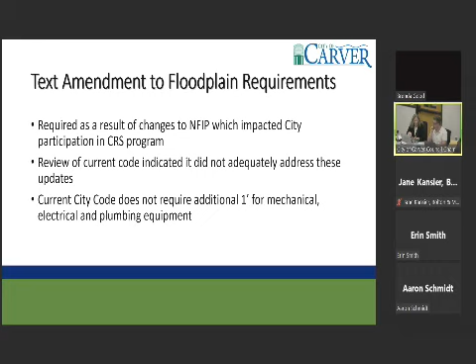The current city code does require a foot of freeboard, or a foot above the flood protection elevation, in order to meet that requirement. But the city code does not currently require that foot of freeboard be applied to things like HVAC, mechanical, electrical, and plumbing systems. So that, in fact, is what the proposed amendment is about.

It's a pretty simple amendment. On the screen you can see the changes. We've basically adjusted the language to note that any mechanical, electrical, plumbing, ductwork, air conditioning, and so forth has to be elevated at least above that regulatory flood protection elevation. Anything below that elevation has to be constructed so as to prevent water from accumulating.

This amendment does comply with FEMA requirements. City staff worked with the DNR and the CRS reviewers to make sure the language was appropriate. The amendment has also been reviewed by the city attorney. Tonight's recommendation is that the Planning Commission recommend approval of this amendment to the City Council. And with that, I'll try to answer any questions.

What if I open the public hearing, now that we've had the presentation? So we will now open the public hearing. Those wishing to address the Planning Commission should come forward, state their name and address for the record. After all comments are received, the public hearing will be closed. No further comments on this issue will be received at this meeting. Anybody?

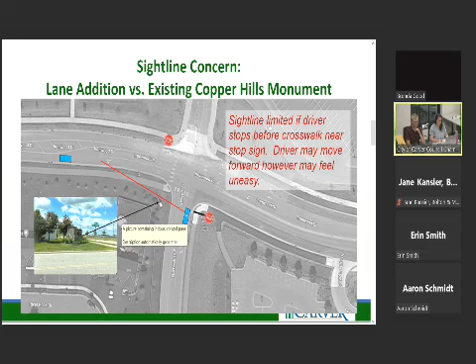So this is the existing crosswalk where it used to be before construction. There is more than adequate sight distance as you look west — you clear the sign and can see a very far distance. So what we're looking to do is get the stop sign back up closer to where the crosswalk is, essentially mimicking the pre-construction condition.

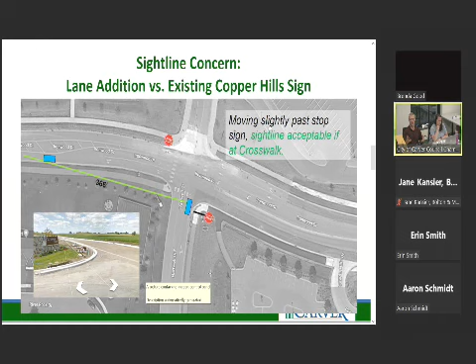So with that being said, what we are planning to do here is revise this curb line, adding essentially a small bump out to the area, which will allow for the stop sign and the crosswalk to be back to where it was before the project started.

In addition to improving sight distance, we also think there will be an added benefit for eastbound traffic as you approach this intersection. They don't have to think about changing lanes as you go through the intersection. It'll keep people in one lane through the intersection, and then you can decide which lane you want to be in after.

So that has a couple benefits. Number one, for the driver on the through street, and also it reduces another conflict point for this driver having to make a decision—is this driver going to stay in the left lane, or come into the outside through lane as he goes through the intersection?

So in general, we think this is a clean solution. It's really going to help with reducing any driver inability to make a decision. As you stop at the stop sign, you're clearly going to be able to see west on Ironwood Drive, and you'll make a decision when it's safe to proceed from the stop sign.

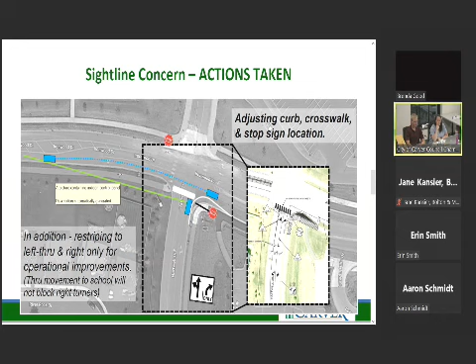One last piece I wanted to bring up tonight: there's also been some discussion in the past and some questions about whether it would make sense to just convert this to an all-way stop intersection.

So what we want to do this fall, after school is in session, is go out and get some traffic counts for the peak—what we call a 15-minute peak at the school—that will help us understand whether an all-way stop is going to function properly or will fail, and whether the two-way stop control is adequate for today.

And then we're also going to look into the future. We'll put some growth projections on it—what happens when Ironwood Drive sees additional volume coming from the west, with Timber Creek and continuing to go west. So it isn't something we can do today because there's no school traffic.

So when you get to an intersection like this, you really have to study that 15-minute peak to see how your volumes behave, and then we can put it into the traffic modeling software and apply some growth factors to it—see what happens today, year zero, project that out to see what happens up to year 20, and see where the failure points are and what the best intersection configuration is.

So that's something we're going to be doing this fall after school's in session. We can definitely report back after that, but for now, opening day it'll still be a two-way stop control, which is fine in this condition because there simply isn't traffic coming from the west, so there isn't a failure per se in the traffic.

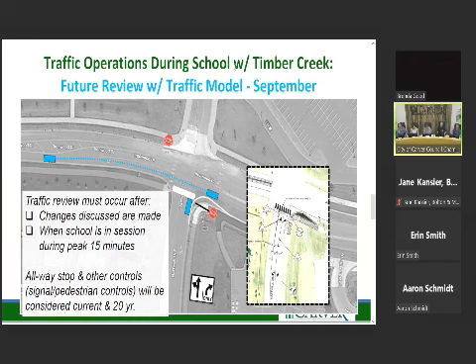Well, let's back up, and I think it's safe to say we can close the public hearing as nobody is here to talk about floodplain issues.

I'll motion to close the public hearing. There's a motion to close the public hearing. Is there a second? I'll second. Motion and a second. All those in favor of closing the public hearing, say aye. Aye. And those opposed? Motion carries.

Public hearing is closed. And now we're to the point where we probably need a motion to recommend.

Do we? Oh, yes. I move... you move to recommend approval, move that to city council? Okay, Reed, go ahead. Oh, she doesn't have a nice one written out.

I move to recommend the city council adopt the changes to meet the floodplain requirements as specified. City council adopt staff findings to amend Chapter 21, Section 24 of Carver City Code, to meet requirements for all floodplain districts, as presented. There you go. All right, thank you.

Is there a second? I'll second. So there's a motion and a second. Any further discussion? No? None? All those in favor say aye. Aye. And those opposed? Motion carries.

Floodplain ordinance changed, or recommended to be changed.

Let's move on to, finally—yeah, let's go to 5.2, Mizzi's Pizza, Carver Square, Planned Commercial Development Amendment, site plan review. Who wants to talk about it? You guys want to talk about it? Just a second. Just you? I think just us. We'll all want to initially talk about it. Let's see.

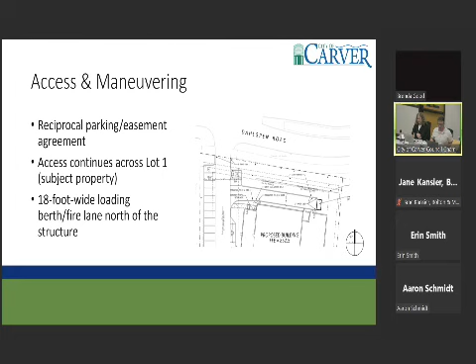Right now, the design of the structure is still preliminary. Mizzi's have provided us some elevations and some floor plans. Construction documents, though, will be reviewed by all necessary parties within the city staff team, including the fire marshal, at the time that those are delivered in the final stage of the development.

Another thing that we spent some time discussing was landscaping, especially considering that new loading berth on the north side of the structure. As some of you may be familiar, there is a mixed-use trail along the south side of Dahlgren Road that would run adjacent to that loading berth. Part of the buffering and screening for that will include at least a 6-foot tall fence and some conifer plantings that would provide at least 75% opacity year-round when they reach maturity. Everything else in the landscaping plan meets the code requirements for shrubs in sodded areas as well.

With that, I'll lay the recommendation before you. The staff recommendation is to approve an amendment to the planned commercial development zoning overlay for Carver Square and Carver Dental Office to allow for a restaurant use on Lot 1, Block 1 of Carver Square, and to approve the site plan for the construction of the structure. With that, I'm happy to take any questions. I see that the applicant is also here with us tonight too, if you have any questions for them.

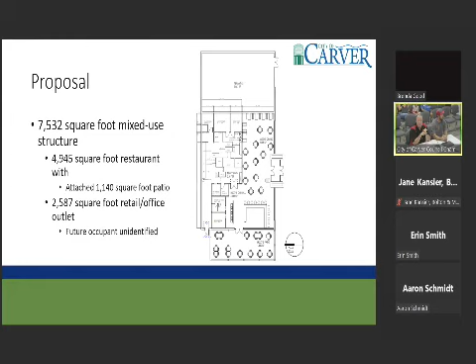Sure. Do we have an idea of proposed entrances? What you see on the page here is our main entrance to the restaurant. Oh okay, that's the biggest thing there. So that would be facing south? Yes, it is facing south. Gotcha. And the future tenant has a double entry door facing south, as well as a service door in the back to access the loading berth.

For Aaron, is this the last open plot on this land, or is there one more in that far corner that could be another building? So this is the last available platted space, the last building we anticipate on this site. Excellent, so we wouldn't expect any huge change in parking needs. And then I guess, can we cover how big of trucks can fit in the commercial loading zone? That was a good idea. Yeah, I think I'm all set.

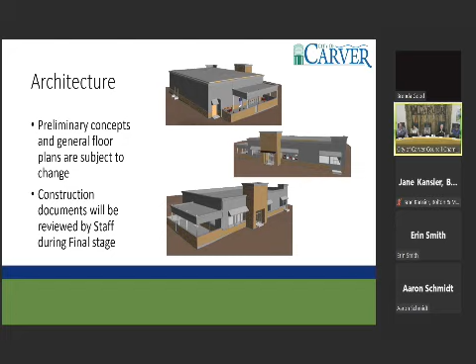Y'all good? Yep, okay. Anybody else have any questions, concerns, or comments? I do, go for it.

My question comes from Heartbreakers in Chaska and how I can hear them when I'm in the Target parking lot. When you're designing the outdoor patio, I live in Oak Tree, about the same distance away. Just make sure there's consideration for designing the outdoor sound so it doesn't blast the neighborhood. That's a good concern to be worried about. You've got an elevation hill going to the neighborhood, but that doesn't mean the sound won't travel briskly to it, so it's a very good concern to point out.

I have another concern. I love pizza, but I live in Oak Tree, overlooking where the restaurant's going to be located, and I don't want to be smelling it all day long. What are you doing with respect to ventilation to mitigate that problem?

Everything that we'll be putting in there will be all of our new equipment, and everything will be ventilated through its proper systems. I can't tell you that you won't smell the garlic smell or the aroma of baking food. I don't know of a way to stop that, to be honest with you. But I can tell you that what you won't smell is a dirty grease trap from an old kitchen that isn't kept up.

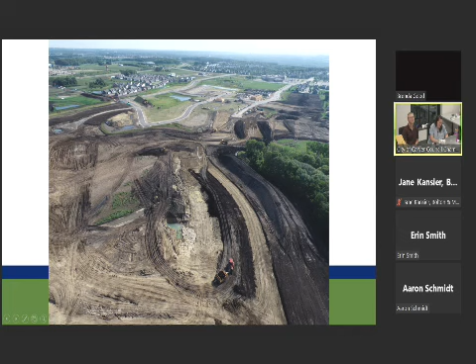So you're starting to see these Timber Creek townhomes come up and just the extensive grading work that has been completed on the site - a good view of where the site is at. I think my toddler would go bonkers if I showed him this photo or brought him here. So an exciting look of construction for Timber Creek.

This is the lot split that you reviewed, I believe, at your July meeting, so you're pretty familiar with that. Shows the Phase 2 takedown, or Phase 2 final plat approval.

And this is the formal platting document that we will use to record. It shows the lot layout, easements, streets, etc. So not the most exciting document to look at, but something that's really important to us at a staff level and the planning commission level.

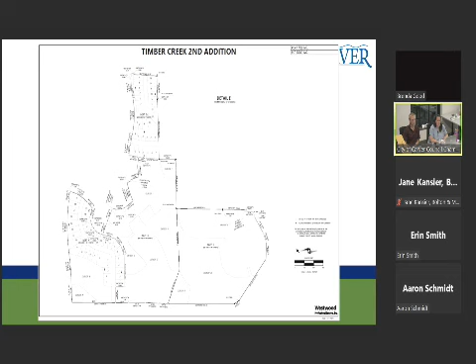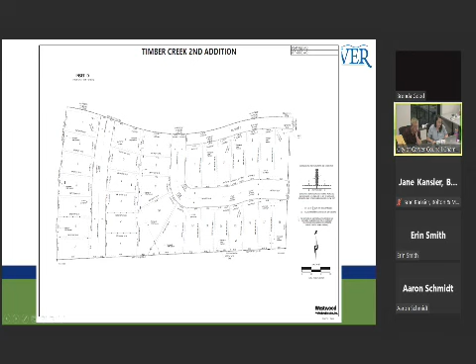So additional views, if you can get your bearings here, this is the extension of River Rock, which hooks into Copper Hills. Copper Hills ends here, this is the new stretch. And the final page, which is the northwest corner of the development.

So phase 1 is outlined in orange, phase 2 is yellow, phase 3 is anticipated for green, and phase 4 is the blue. So moving south, phase 4 will be the final that we'll look at. Again, just that illustrative look to get your bearings of where we are. So phase 2 is largely this area here, as well as the area here.

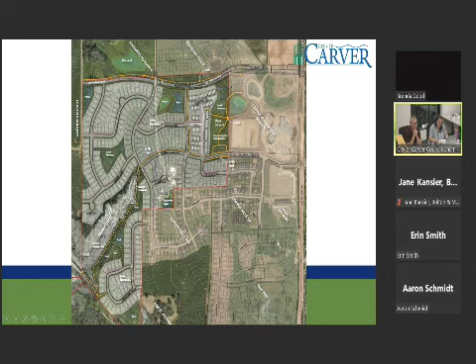I'm going to jump to Ironwood Park. I'll run through it really fast just because council has completed final approval of the project. And as the planning commission steps more into that parks role, I just want you to have a feel of what was approved for Ironwood.

So top corner is the outdoor classroom that we're installing in the existing circle of the park, so likely will be heavily used by Carver Elementary, the neighbor. The bottom photo is both an overview as well as a basketball court, so you'll see that we got Carver's logo on there, which will be really exciting and nice.

And we focused a lot on wayfinding and signage. That's been a push that we've been working on at the city. You're seeing some of our new signs pop up, like at the fire station, community park, Lions Park. Thank you, Lions, that are on the commission. I saw that dedication yesterday.

We're working on wayfinding signage, so the photo here is a drop-off zone, but also a spot where people could figure out a trail connection. Kids could wait for their parents on some limestone blocks that we're starting to see through the community. So pulling some of those wayfinding projects that we're using on the JCP project, the 6th Street project, into Ironwood Park to bring you back to that Carver feel.

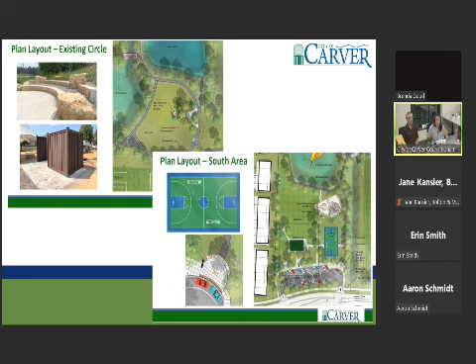Something that even as a non-skater I think is really exciting is the skate park. So a new view of the skate park that will be in the community. If you've ever been on JCP, that skate park is wildly busy. So the skate park here is concrete, which is exciting, kind of state of the art right now. There are areas that are sunk into the ground with some other ramps. So again, not being a skater, I'm told these are really cool.

So something we're excited about, we're hoping it will be a draw to the community, so people will visit Carver to check out the skate park.

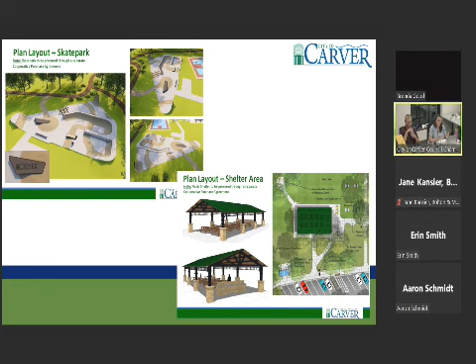We also have a proposed shelter, which is really exciting. We focused a lot on the shelter for people that might live in the townhomes in Timber Creek, so they could have some gathering space since there aren't communal spaces in those townhomes. So if someone wanted to have a large gathering, it's available there. We also included some exciting things like permanent ping pong tables, permanent cornhole, and some Adirondack chairs in the park. So just giving it more of a family feel, you can rent beanbags from us if you're renting the pavilion, and have some of that play space built into the park.

Also some examples of the signage, so again, you're starting to see them throughout the community. The council on Monday reviewed a grant that we were awarded for trail signage throughout the community. So we're really working on bringing our signage up to Carver in 2022. So a good look at it there.

And then again, Ironwood Park, this looks like a crazy little diorama that we're looking into, but that is the future expansion of Ironwood Park with the grading work that they're starting on. So in the future, skate park will be about here, pavilion is here, basketball court is here. So really looking forward to this park. We're anticipating open spring 2023. Okay, I say that with my shoulders up for confirmation.

Yeah, nice. And some examples of the product that Lennar is building in Timber Creek.

So again, tonight is a review of the final plat. Last step for the Planning Commission, City Council. It's 68 additional homes, looks very similar to the preliminary plat, and it allows us to begin work on that developer's agreement with the City Council and developer. I will open it up for questions.

Questions? So with the second phase, that would be all of the townhomes approved? Phase 1 had all of the townhomes, so that's done. Phase 2 is purely single family. They're not all built, but they're correct.

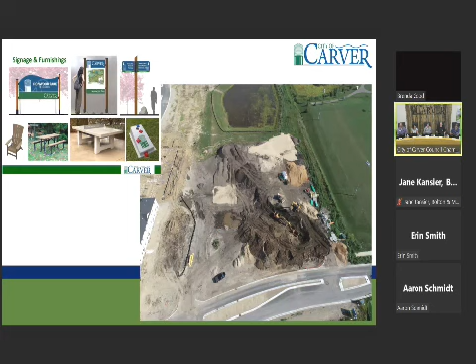If we go back to the picture where we did the platting, the blue area was the new lot. So all those previous pictures are that blue section, and the non-blue is presumably phase 3, right? Because originally we were thinking phase 2 would be larger. Correct, in the past. That's why we needed to split it into smaller phases so they could do it in multiple phases, and Lennar is purchasing the property as they go.

And then, so as part of the traffic study, we did that when we did the initial preliminary, because of the large number, the 300. Correct, and that was good with Aaron's presentation. It's all coming together, yeah. Excellent, okay, that was all I had, not too many for this one. Thank you. Jim? I'm good. Greg?

With approval after this, it goes through city council, early September-ish. With this second phase, is Lennar looking to basically start doing city sewer and water before the frost this year, do you know? That's my understanding, that they're hoping to get some sewer and water in this fall yet. Got it.

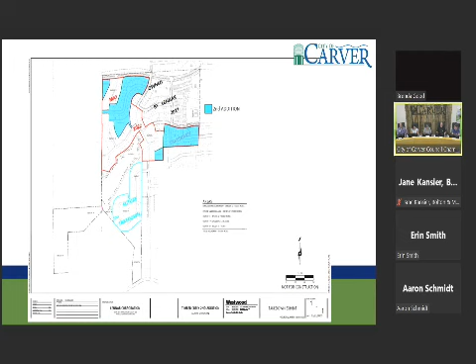Thank you. Yeah, Daniel? Not as exciting as a restaurant. Oof, brutal. Nowhere near as exciting. No, as pizza, man, nowhere near as exciting.

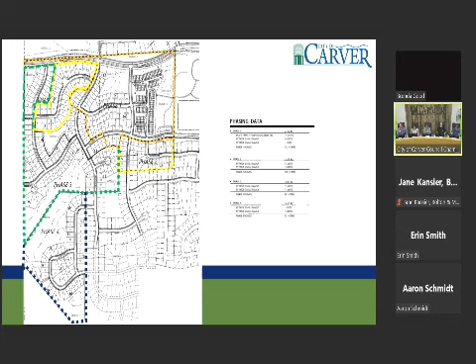All right, in that case, could I get a motion to recommend approval of Phase 2 of Timber Creek? I move to recommend approval of Phase 2 of Timber Creek. Thank you, Reed. Is there a second? I'll second. Thank you, Jim. Any further discussion? If not, all in favor, say aye. Aye. Those opposed? None. Motion carries. Send it on to the council.

We're now down to number 6, which is communications. Reed, you got anything to communicate?

No, I just do like the new signs for all the parks, and I did drive by Lions Park, and they're much easier to see, so that's a great job by the city there. Cool, yep, I agree. Jim? If you had driven by last night, you could have seen us Lions getting our picture taken. I totally forgot. You told me, I forgot.

I don't have anything at this time. All right, Krista? Well, we got Steamboat Days coming up, right? Thank you, Erin. And then also, anything we need to be concerned about for Brookview? There's been a number of emails going around. Not sure how else do you want me to put it. Not at this level, no. Staff is taking care of it.

Thank you, though. Greg? That was my only point to bring up. I think if there's something to be concerned about, it's gonna show up on an agenda. Billboard? Possibly, I don't know, maybe in the Steamboat Days Parade. Oh, do not. Bill? Good to go. All right, okay, I have nothing to add except that Steamboat Days is coming, hope to see everybody there.

All right? I should say one thing. Hold on, Jim, you had your chance, go ahead. If anybody's interested in the history of Carver, Carver on the Minnesota, there's going to be a presentation in the Church by the River on Saturday from 1 to 5, on the history. It's really pretty interesting.